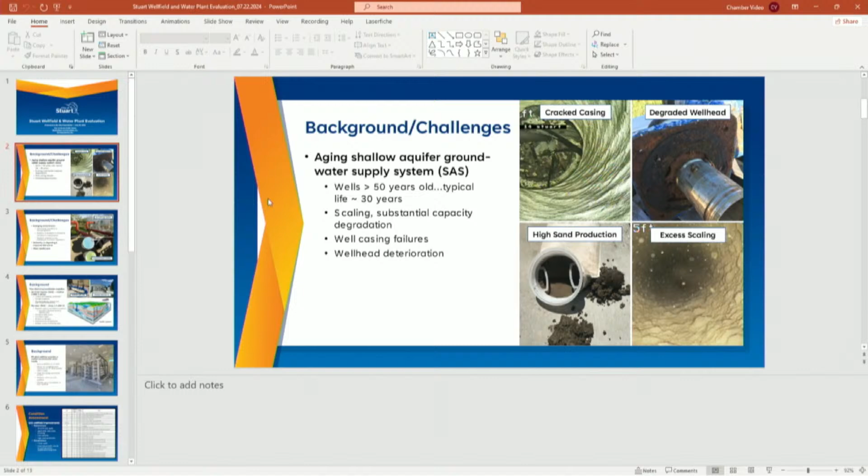As Peter mentioned, the age of the City of Stuart well field has exceeded its useful life. It treated the City of Stuart very well, lasting about 50 years, but typical useful life for a surficial well field is about 30 years. The material of the well is steel, which doesn't last as long. A PVC well casing does last a bit longer, you could get a longer life out of that, but pretty much 95% of these wells are made of steel casing.

So there has been a condition assessment for the wells. We did downhole videos to determine the condition of each well, and we did find scaling. We found substantial capacity degradation on the wells, holes in the casings, definitely well casing failures. Also, the screen at the bottom of the well has been degraded or is no longer existent. Therefore, with that not being in place, there was a substantial amount of sand production for some of these wells that does get into the water supply system.

And that sand is actually creating impacts to the filtration system that is used to remove the sand from the water supply. So this does increase maintenance of this particular filtration system. So these wells are, like I mentioned earlier, beyond their useful life. Typical well life is 30 years.

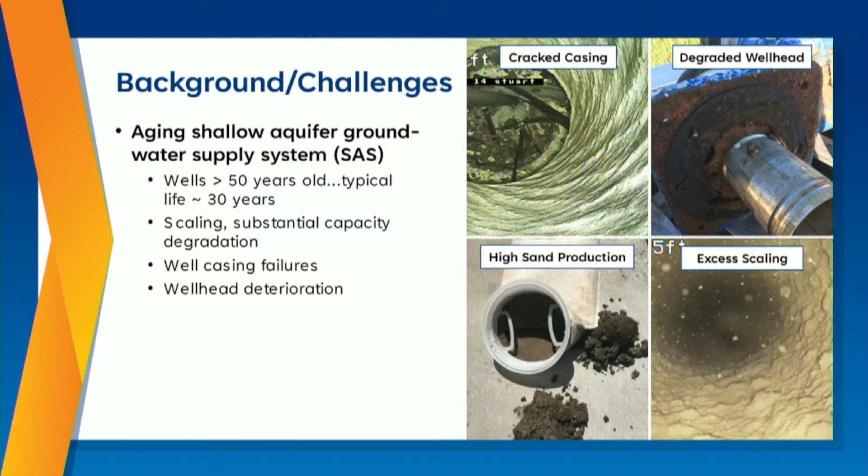Other challenges that the city is well aware of is the emerging contaminants issue, the latest being PFAS. But also there are VOCs, another contaminant the city has been dealing with for many, many years. These emerging contaminants have required additional treatment processes, such as the ion exchange system and also VOC towers. So it's led to a more complicated system, having to have all these additional treatment processes to treat different types of emerging contaminants that are plaguing the city's surficial aquifer supply currently.

So other areas, that's just the reliability and the degradation of the surficial aquifer. It's impeding on the different treatment processes and the water quality that is being provided to the City of Stuart for drinking water.

One thing I do want to note, we love this photo in the bottom right corner. The lower bucket, that's where it's just your surficial aquifer supply treated normally without ion exchange. So there is a bit of that organic color. The organics in the water supply do produce a certain color to your water. It's not harmful, it's just aesthetically it doesn't look good. So with the ion exchange system, you could tell the difference.

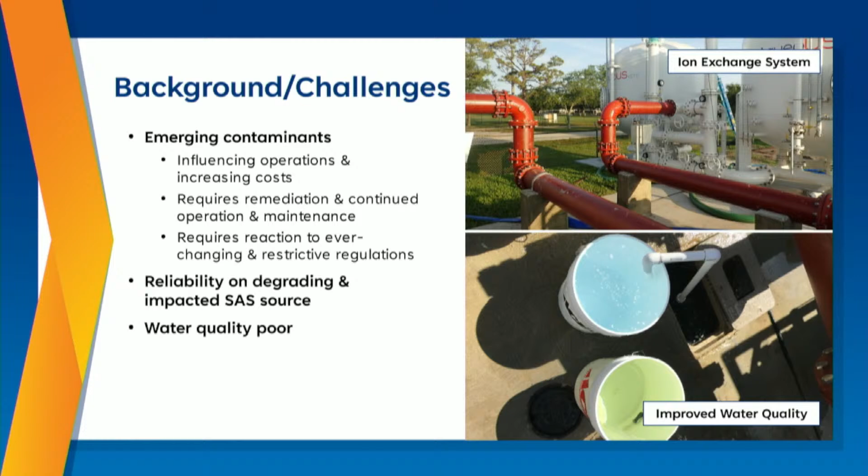Just a background on the two different potential water supply sources available to the City of Stuart. The first one we've been talking about is the surficial aquifer supply. The depth of this well is less than 200 feet. The city's well depth below land surface is about 125 feet.

Over time, what happens with these wells - yes, you rehabilitate them over time, but eventually, like I mentioned earlier, you reduce its useful life within 30 years. So over time, the production of the wells is limited, capacity is limited or reduced. And also drought impact on a surficial aquifer is more pronounced than on a Floridan aquifer water supply. The other contaminants, I should say impurities, are the organics we discussed, as well as iron. You find a higher level of iron in a surficial aquifer supply versus the Floridan aquifer supply, and of course the man-made contaminants that plague the groundwater supply.

So the other water supply source is the Floridan aquifer. That's being used currently at the city's treatment plant. The depth of that well is about 1,000 feet, plus or minus, below land surface. It's a confined aquifer, which means it protects the water supply from those man-made contaminants that are impacting the groundwater supply, the surficial groundwater supply.

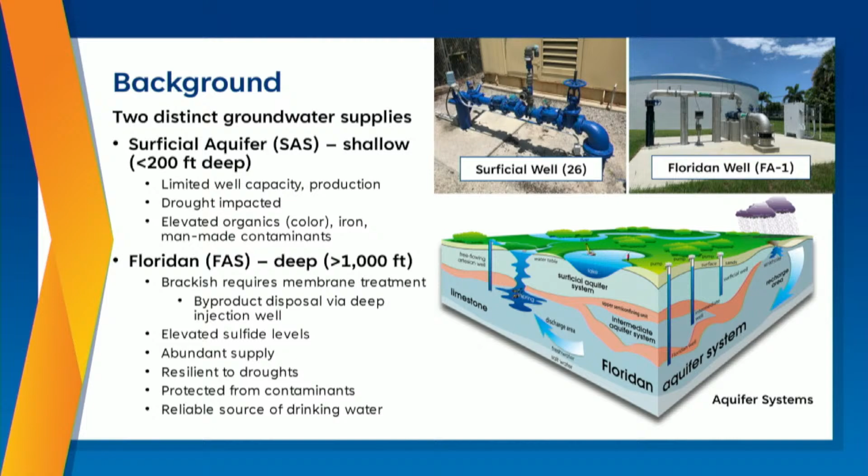So Peter did mention, I'm sure we all know, that there was a ribbon cutting on May 10th. The ribbon cutting was for the 1.5 million gallon per day reverse osmosis treatment plant. There is room, the design does allow for an expansion to a 3 million gallon per day reverse osmosis treatment plant. It's really just adding an additional membrane to our skid, and also a degasification tower, an additional degasification tower. So part of the design of the 1.5 million gallon plant allows for future expansion and build out to a 3 million gallon per day treatment plant.

The water source, adding this additional treatment process has definitely reduced the stress on the surficial aquifer supply. Going to that additional 1.5, so 3 million gallon per day expansion, could benefit and relieve more stress on the surficial aquifer supply.

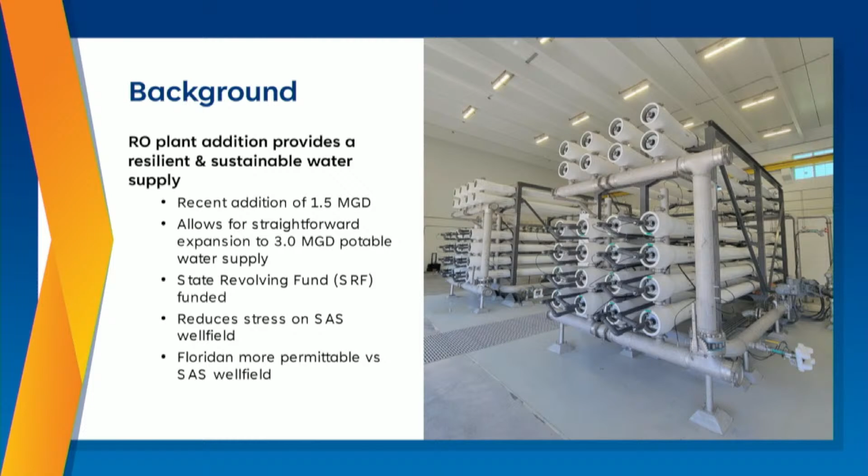The surficial aquifer in Martin County is considered an aquifer of limited availability just because of the shallow depth and the general low yield from it. And so getting permitted for surficial aquifer water supplies is relatively difficult from the Water Management District, whereas the Floridan is an alternative water supply according to the Water Management District, and they really support and promote the use of that. So those two components, plus the permitting regulations with existing legal users and wetlands impacts with your surficial aquifer, make it much more difficult. Thank you very much.

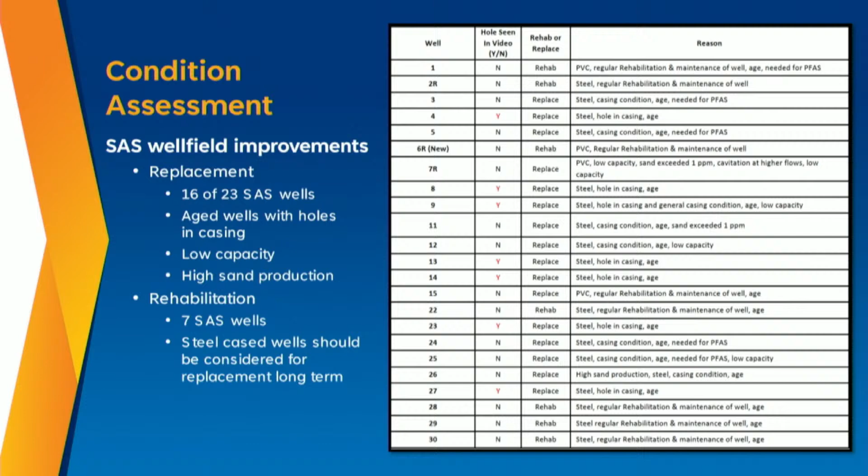Additionally, we did evaluate the current capacity of the well field and the permitted capacity of the well field. Day one, the 23 wells or so were able to provide 7.7 million gallons per day when the well was new. Today, it's been reduced by about 30 to 50%, and that's just due to the condition of the surficial wells. I have here 5.5 million gallons per day of actual flow, and that's really on a good day. If there's a drought or a well is not producing well, it's actually been reduced to about 3 or 3.5 million gallons per day.

So to put that in the context of max day, or the capacity of the plant, the design capacity is 6 million gallons per day. So that 3.5 million gallons per day of water supply does not meet that 6 million gallon per day max day requirement.

Summary of the cost for replacement ranges from about $1.5 million to $1.8 million. And that range reflects the complexity of the replacement of the well, whether it's a larger well or a smaller well, larger diameter versus a smaller diameter well. But overall cost is about 1.5 to 1.8 million for replacement of a surficial well.

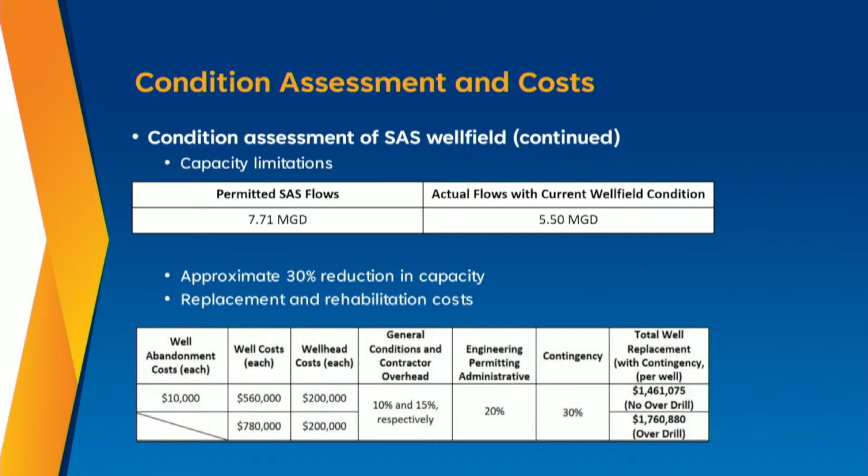Something else we've been working on with the city, not necessarily as part of this evaluation but just in our tenure here, is evaluating their well field and providing a recommendation for standardizing the wells, essentially using different materials that promote longevity, like PVC versus steel, and stainless steel versus a steel wellhead. These materials increase the longevity of the well.

The city, with our help, did replace one of the wells using this standardization. So we do have a prototype already in place for all future wells and future well replacement.

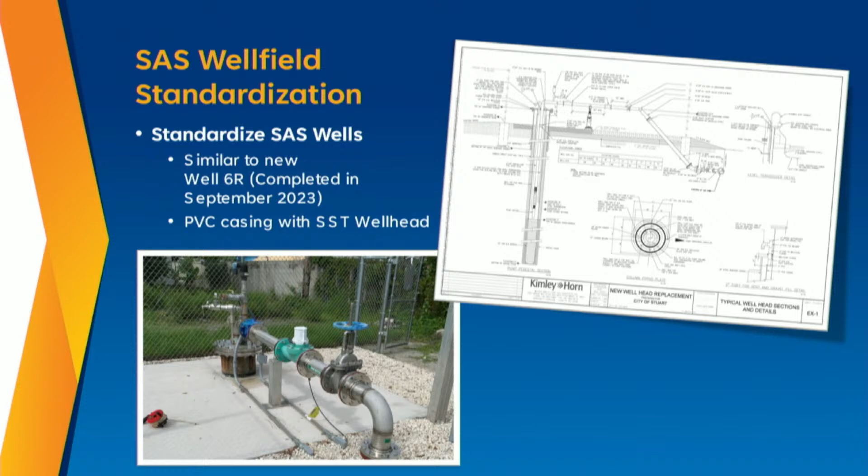Other considerations include the proximity of the wells to sanitary hazards. There are setback requirements for compliance for new wells. The existing wells, because they've been around so long, have had a lot of development around them, whether commercial or residential, plus additional force mains, stormwater systems, et cetera. Some of these wells are actually within the setbacks, so if we were to put a new well in its current place, it would be a non-compliance concern when permitting that new well.

So we have looked, at a high level, at siting the superficial wells, and that also played a role in deciding whether to replace a well or abandon it and go to the Floridan aquifer supply, expanding that 1.5 million gallon per day RO treatment process to 3 million gallons per day.

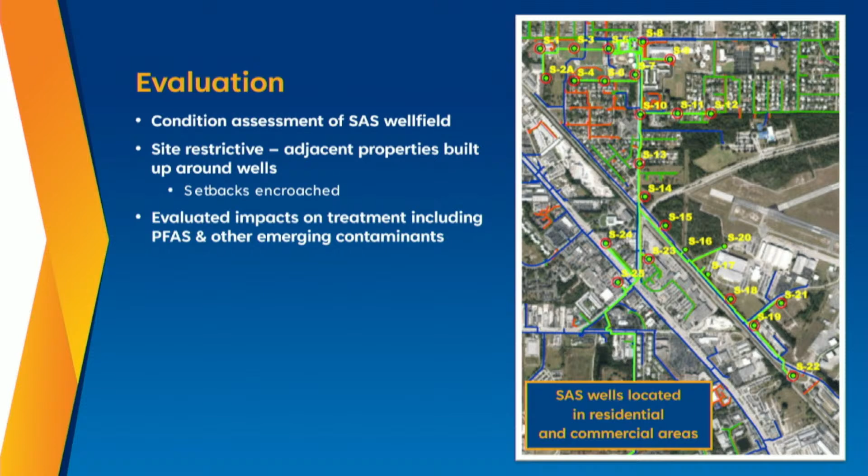We also evaluated emerging contaminants and their impacts on the wells. There will be a portion of the wells that will have to be replaced no matter what, because these wells have an emerging contaminant source within the groundwater they're pulling from. So the city is still obligated to treat that water for PFAS removal or VOCs. Those wells will still have to remain and be replaced regardless of expansion to the 3 million gallon per day RO treatment.

Other considerations are the ratio of superficial water supply versus Floridan water supply, whether it's 75% superficial and 25% Floridan, or 50-50. What does that blend look like, and what is the resulting water quality? So we considered those aspects when looking at different treatment process blending.

Because we still have to replace the superficial wells that have a contaminant source, we will have to blend that superficial water with the Floridan water supply source. So we looked at different combinations and ratios of water supply and capacity from the Floridan versus the superficial.

Other considerations are obviously capital costs, because that's really important, and operating costs long-term, we looked at just a 10-year horizon. So we considered capital costs for different sources, different ratios of Floridan versus superficial, what that additional treatment process looks like, and what the associated cost is.

Another consideration: if you go more toward a Floridan water supply, there is a reduction of disinfection byproducts, or DBPs. There's a maximum contamination limit you have to stay under, and DBPs are potentially elevated from a superficial aquifer supply versus using the Floridan aquifer supply.

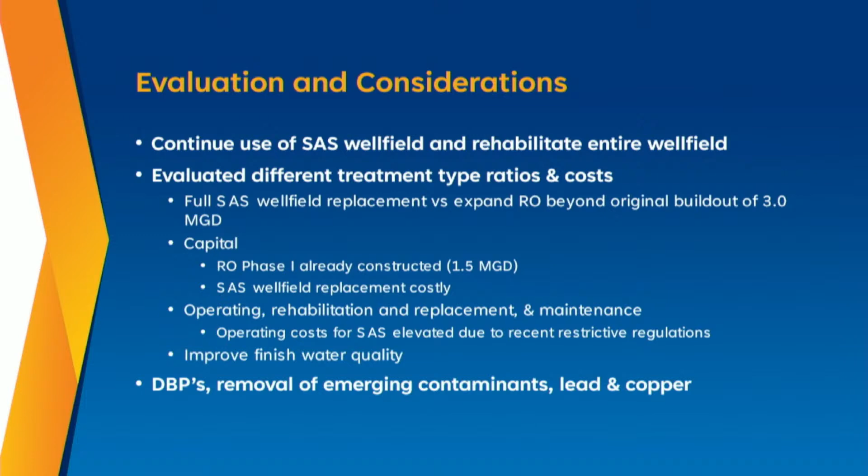We did a cost comparison for four different options, looking at different ratios of Floridan supply versus superficial supply.

Option 1 assumes things stay as they are today: you replace and rehab the entire well field, with capital and operating costs associated with that. The 1.5 million gallon per day RO treatment is still there, but supplemental, meaning total capacity would be a 6 million gallon per day lime treated plant plus the 1.5 million gallon per day RO treatment, supplementing the water supply—so you're really only using about 4.5.

It offsets the lime treated water if you're using your RO treatment. But what that does is it allows flexibility with utilizing the two different water sources.

Option 1A reduces the requirement. The ratio is 4.5 million gallons per day of treating your superficial to 1.5 of treating the Floridan aquifer supply. So you have some flexibility, but not as much as option one. However, you can reduce the amount of wells that you need to replace, and you can just abandon them.

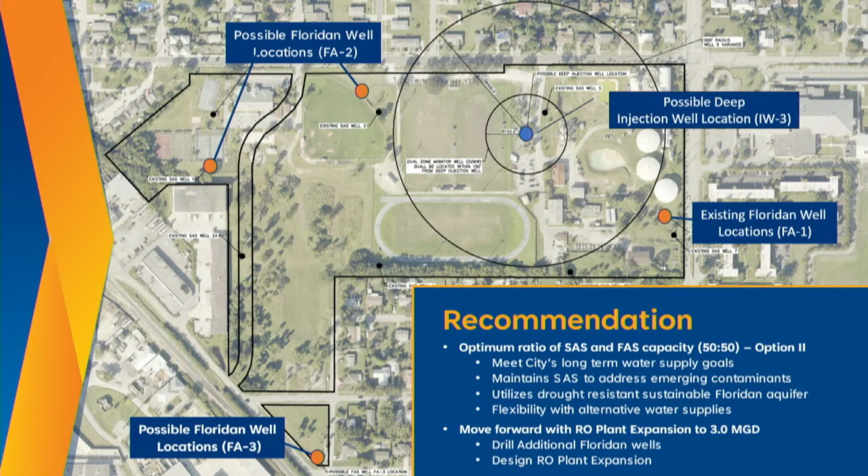In conclusion, we request authorization on behalf of the city for design and construction for the superficial well field improvements, also the reverse osmosis plant expansion, and the design and construction of additional Floridan aquifer wells. And then long-term, just consider an additional deep injection well for reliability and backup for the existing deep injection well at the wastewater treatment plant.

Wait right there in case we have some questions. Sure, yes, we're available for any questions you may have at this time. Any commissioners, anyone have any questions?

I don't have any questions right now, but it was a lot to take in there, and I think that we're going to have to really be spending some time evaluating, but I do think that you have some very good recommendations, and it is definitely some complicated stuff. So, but great presentation, by the way. I think you did it very well.

And obviously, Mr. Cunin and I wanted to bring it forward just to give the board an overview of what's going on right now. And what really is happening is the new RO plant is open, but the operational costs really, Mark probably knows more than I do about it, but are undetermined at this time.

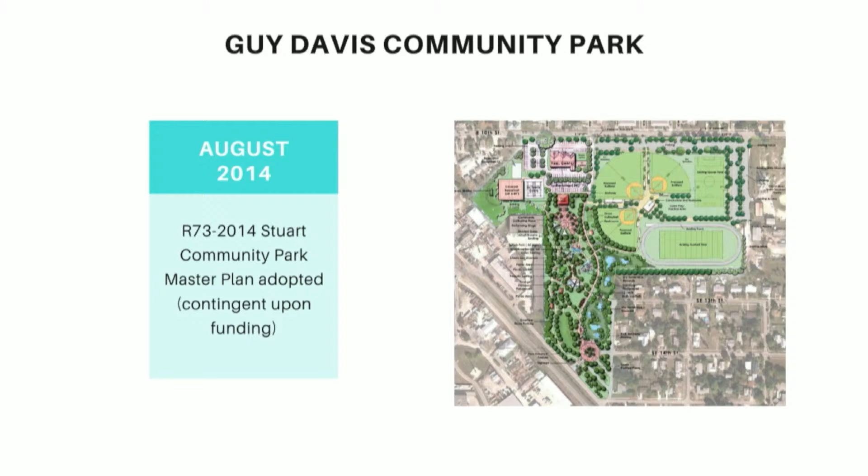We did not get funding at that time, so there was no action taken until actually 2019, when David Dyess became the city manager, we revisited the master plan and amended it based on the community needs and some of the changes that had occurred over the years.

And then the project was divided into 4 phases. Phase 1 and 2 included new baseball fields, concession stand, restrooms, upgraded playground equipment with some water features, new stage pavilions, landscaping, and parking areas. The phase 3 and 4 would come into play if funding becomes available. Phase 3 was recreation center improvements, and phase 4 was overflow grass parking area.

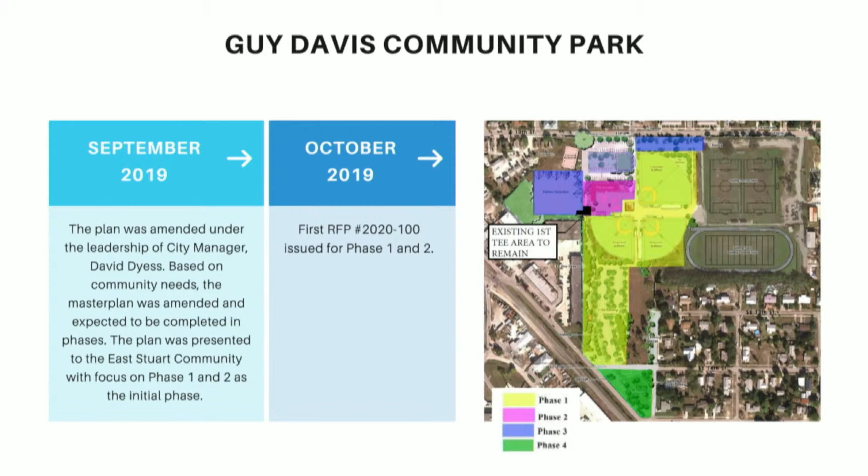And so we revised the master plan. We presented to the East Stuart community back in 2019, and we went out for RFP just for phase 1 and 2. And this is back in 2019.

And then the master plan was further amended in 2020. We changed the design to include a multi-purpose field and removed the baseball field since we already have the baseball fields at the Sailfish Park. So we rejected the proposal that came forward as part of the first RFP, and we went out for RFP again, second RFP in 2020, with the proposed changes to the master plan.

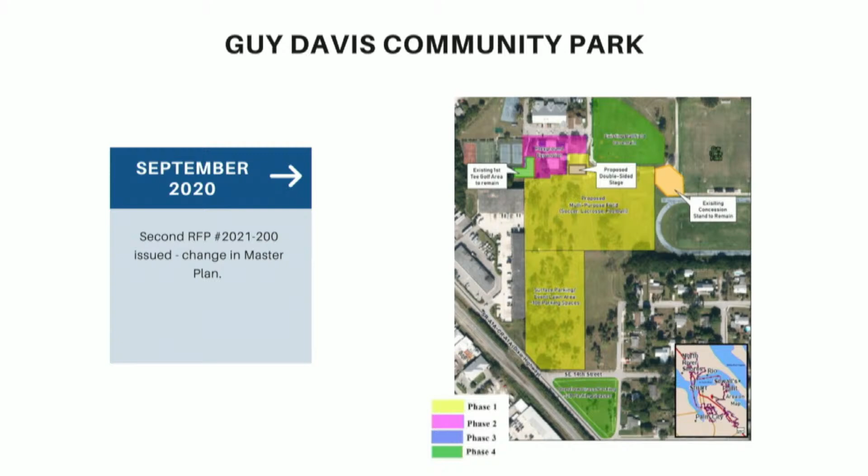At that time, we received 10 proposals for the project. We contracted the design with Calvin Giordano and Associates in 2021. And then later that year, we also conducted a pre-design survey to get feedback from the East Stuart community and Stewart residents. At that time, we surveyed 327 participants.

Some of the top activities that came from that survey was they were looking for exercise and walking trails, picnic areas, event space, children's play equipment, lighting, site amenities and furnishings, bathroom facilities, and sports programming.

So then we started working based on the feedback that we received and the master plan. We started working on the schematic plan, and that was presented to the board in January 2022. We had a lot of public that showed up at that meeting, and some of the comments we heard at that meeting was they wanted to see a skate park in the plan.

The East Stuart community wanted to make sure that we acknowledge the culture and heritage of the community throughout the park. Additional restrooms on the south side of the park, improve the existing running track, improve lighting, ensure that the proposed stage has the ADA compliance requirement, and provide activities for all age groups. And so based on the feedback that we received at that time, we further engaged with the community to gather history of East Stuart.

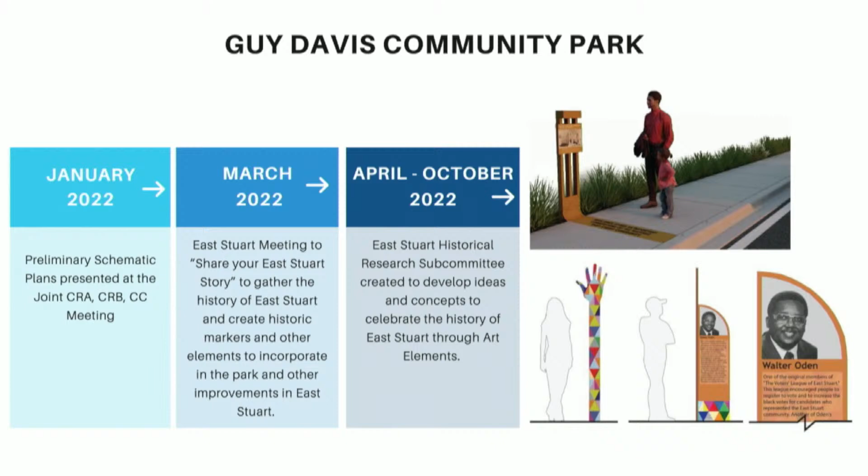Giano is here. He's going to present the East Stuart Public Art Master Plan that was developed through those meetings.

We updated the master plan based on comments and feedback, and that was brought back to the community and board meeting in 2023. The original scope did not change. We kept the original scope, but did incorporate an area for a skate park, about 12,400 square feet, pending that the private group provides funding for the project.

We're also providing infrastructure for a second bathroom on the south side of the park, a community dog park, lawn area for activities on the north side of the park with yard games, and a linear park that could be enjoyed by all ages, and additional art elements throughout the park.

The additional scope would be completed as part of the second phase. We're still keeping the original scope, and we're going to incorporate these additional elements and requests that came through the meetings, but those would be incorporated as funding becomes available.

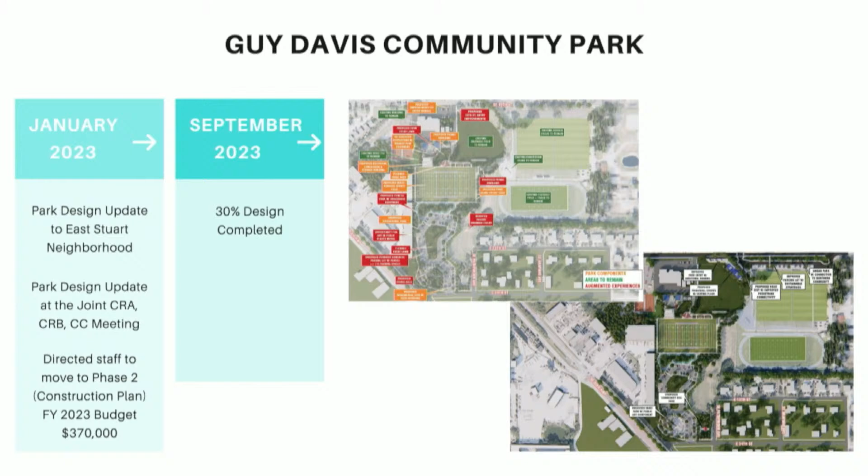At that meeting back in January 2023, the board did direct staff to move forward with engineering and construction plans for the project. We completed 30% design back in September 2023, and the other departments reviewed those plans and provided comments.

The consultant is working on finalizing the 60% design, and I am budgeting $7 million in the fiscal year 2025 CRA budget that you'll see in September for your review and approval. At this time, I'm going to ask Giano to come forward and give an update on the design and what the next steps are in the process.

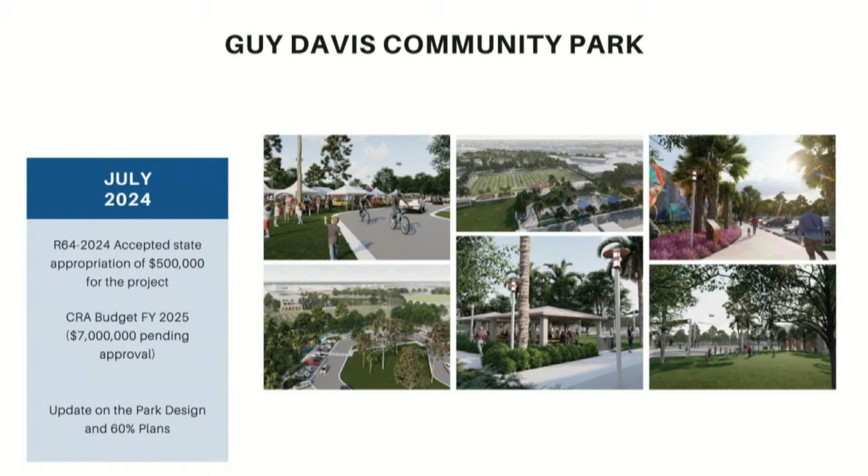Good evening, Giano Fioli with Calvin Giordano and Associates. It's a pleasure, and we do have a couple slides that we want to share with you.

As mentioned, we have worked very diligently to put together a master plan for this overall park. We really worked outside the boundaries of our scope to make sure we took the extra steps to ensure that long-term additional phases that could come about as a result of the development of this park would all work very seamlessly with what the first phase would be.

Much to commend the city for, we actually took the time to pause and really build a relationship with the community, to let them know that the improvements of the park are here for the betterment of the overall community as a whole. I'm so excited over this.

A lot of the feedback we got over the prolonged participation of the community members — in fact, a lot of them opened up their private resources of data, photographs, and as much information as they could to contribute toward that effort.

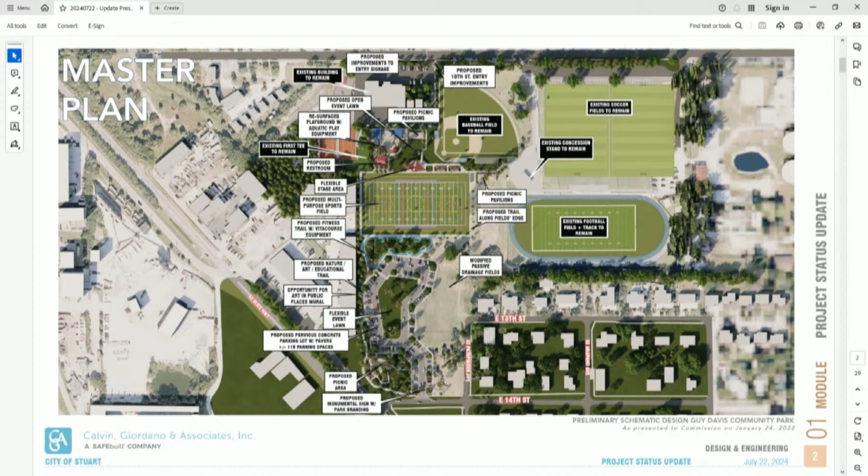We met in this room on several occasions with that subcommittee next, and out of that committee we had a lot of discussions about how we wanted to celebrate the community and acknowledge the value that they brought to the overall neighborhood.

The takeaway was that there were six main themes we wanted to celebrate through that program. One was celebrating the women in leadership, particularly recognizing that women at the Spectrum School were really the torchbearers in teaching young children how to be active in the community. They also wanted to celebrate the migration of the many different pioneer families that came here.

Of course, some acknowledgment to Mr. Guy Davis and his contributions. They wanted to celebrate educators, celebrate the impact of sports, and celebrate the Black historic businesses, particularly with a focus on the entrepreneurship that some of these businesses have.

So we've compiled all of that together into an East Stuart Public Art Master Plan. The way we see it, this is the first step to a living document that should be added to periodically so that this history never gets lost. We are limited to the amount of data that is accessible to us through the residents.

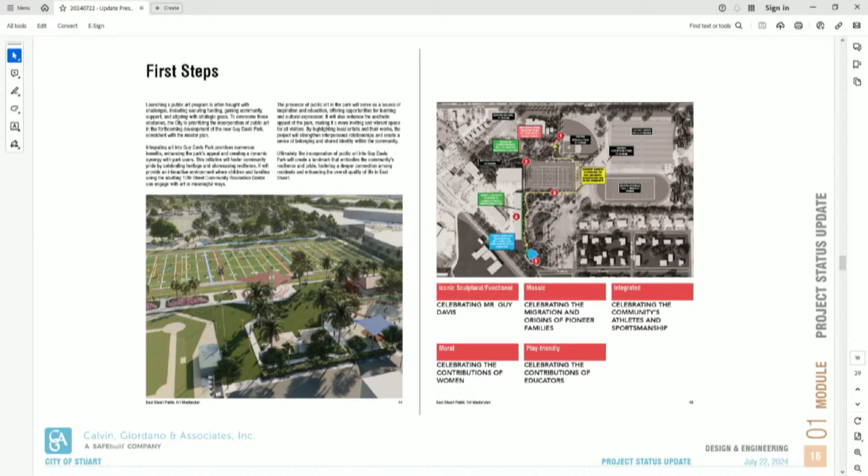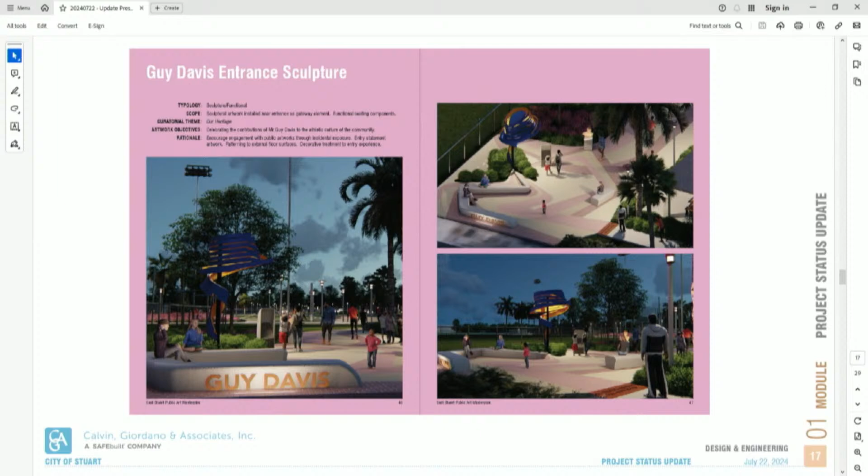I'll walk you through these quickly. The first is the namesake of the park, Mr. Guy Davis. We want an entry feature that celebrates him. One thing we heard over and over was that he was most recognizable by his hat. So we have a hat sculpture made up of a ribbon, the idea being that the ribbon ties everything together. The outside of the ribbon is royal blue, the inside is gold—those were the colors of the school of Spectrum. We wanted to bring that history into the overall component.

We also wanted to celebrate the pioneering quality of the community. We're working with our architects so that part of the structural system are panels that essentially become the facade of the restroom and concession building. Each panel becomes an opportunity for art display, so a myriad of different artists could provide art components there, and we're looking at potentially having mosaics go on that one.

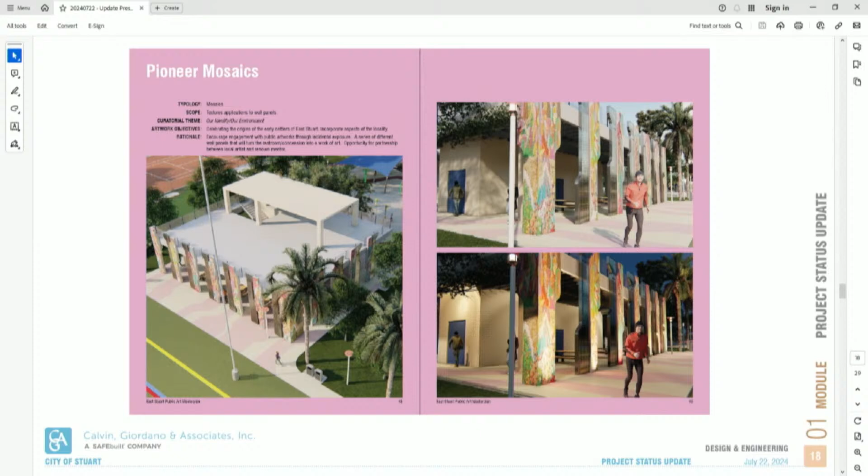We also wanted to create a sports walk of fame. These will be components embedded within the concrete with plaques, celebrating the different members of the community who have gone on to do great things in the world of sport.

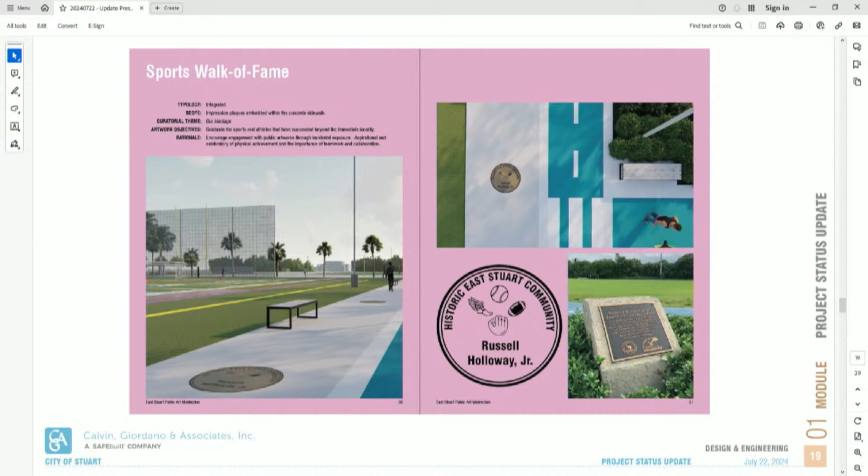Along the east side of the park, where you see overhead utilities in the image, we're working with the utility companies to get those undergrounded. We're working with FPL to service that building from the south, and with AT&T on the wires coming across. That'll give us clearance and an opportunity to look at that blank facade, currently molded and mildewed, and work with the property owner so that wall can become a women's mural wall, celebrating the value and role women played in the overall community.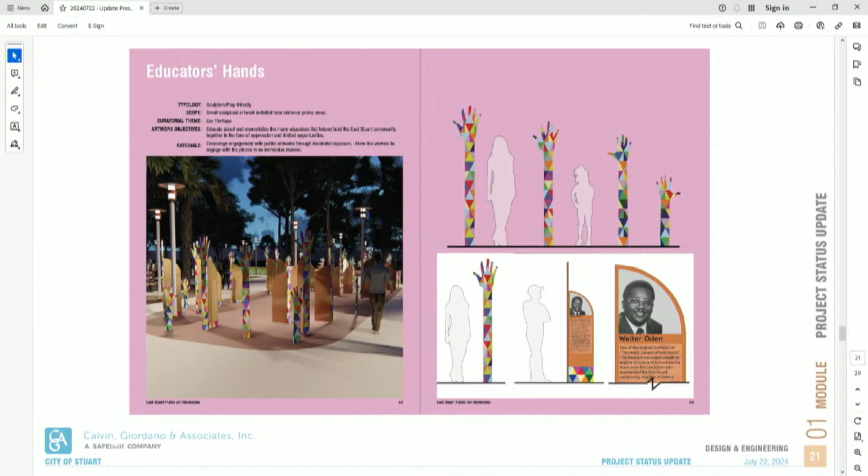And I believe there's one more. This one isn't really an incorporation into the park project, but so much of the history of the community is lost when the buildings are lost. So we wanted to create memorial markers that could be placed throughout the East Stuart community to identify critical components of that community that are no longer there—markers that mark what used to be there, whether a corner store that was important, a member of the community, or something that merited distinction, along with a plaque with some images.

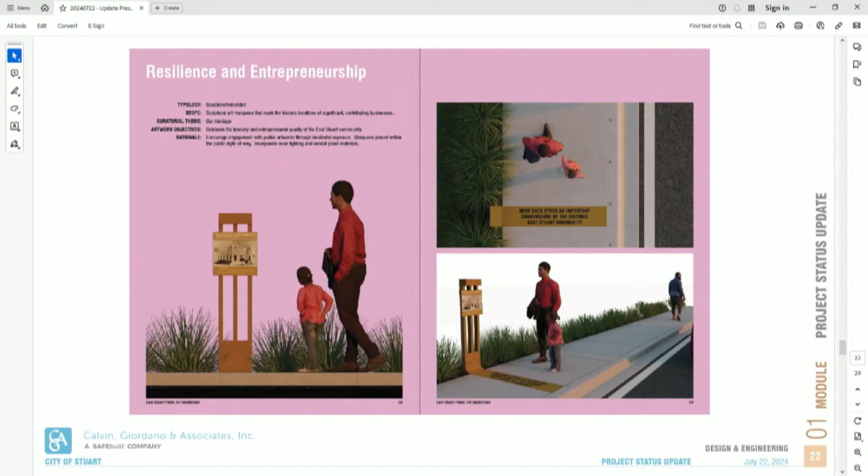Awesome, great material, I like that idea. Yeah, next.

Through our research, we were able to identify a lot of different properties that were either of significant members of the community or of significant value to the community, which we thought would be meritorious to be looked at as part of the overall master plan.

As Panal mentioned, we're now finalizing the 60% plans. We have a bit of a holdup with the utility companies—we're trying to get those negotiations done because of the pause we took to come up with the master plan components. There were personnel changes at the utility companies, so it's like dealing with them all over again from scratch, which has taken more effort than we wanted. Our goal is to have the 60% plans done by late August, early September.

We're then going to bring on our third-party cost estimator to give us a full evaluation of all the components of the park. At that point, we'll determine, within the allocated budget, what can be part of the base bid.

And then we're going to bid out all the other components of the park, even if they're over budget, as add alternates, so that you can get pricing directly from the contractors, so that you don't have us guessing what the market price is, but you have the contractors actually telling you what the cost to build these things are, so that you can prorate and have real good numbers to plan for future phases.